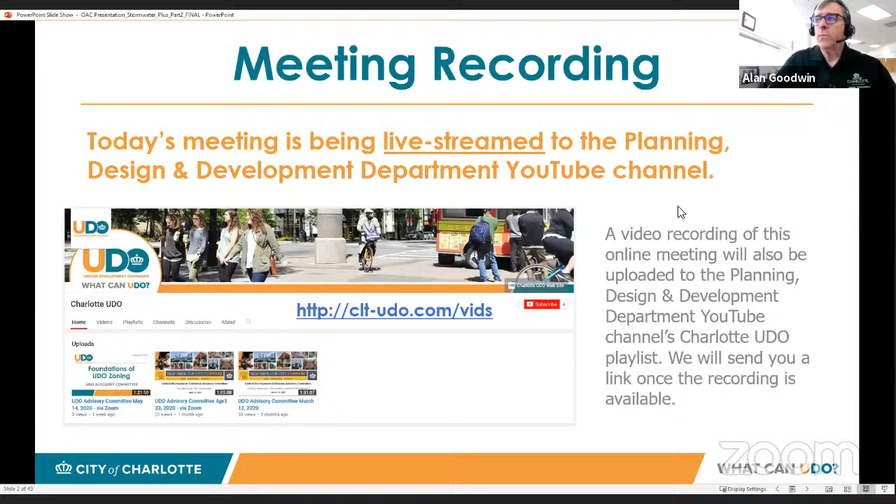And just as a reminder, we've got a presentation that will be narrated by staff today. There will be a couple of stops along the way that we can stop and discuss the material and answer questions you may have at that time. But in the meantime, as we go along, if questions come to mind, please use the chat feature in Zoom to enter your questions. We'll try to keep up with them as best we can live, but chances are we may have to go back and revisit some of the chat and make sure we've answered questions and addressed comments as they've come in. And then obviously at the end, we'll stop and spend as much time as we need to deal with the questions and comments that have come in during the course of the presentation. So at this point, I believe I am handing off to Jordan Miller from our stormwater section.

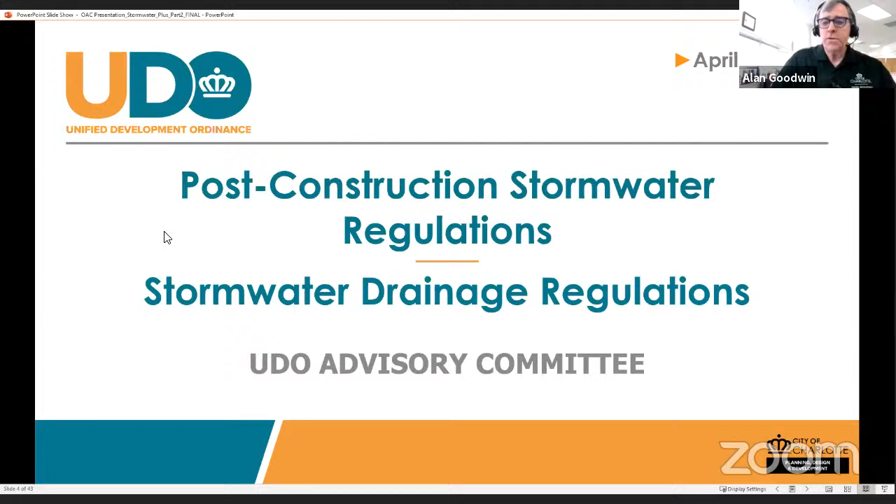Today's topics, we've got a couple of topics to cover today. We're going to be talking about post-construction stormwater regulations and also stormwater drainage regulations. So Jordan, I think this is where I hand off to you.

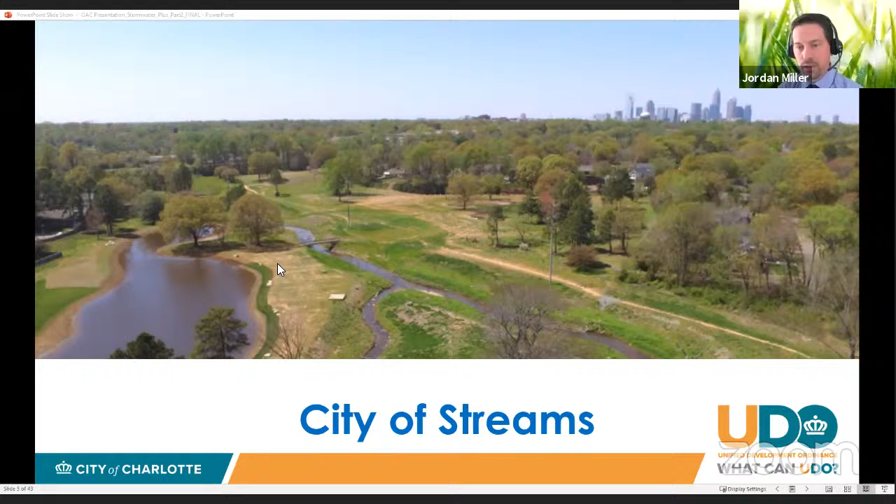Thanks, Alan. Appreciate it. So a lot of these first few slides will be the same slides that some or all of y'all would have seen 2 weeks ago when we began the stormwater discussions. So this is just a lead-in slide to remind everyone that we have many, many streams and tributaries within our watershed. We rest on a ridge. So we are the headwaters of a lot of streams, meaning we are where a lot of the streams begin and lead into both the Yadkin and Catawba river basins.

We have reasons to do that outside of being good stewards of the environment and in regards to federal, state, and local laws and policies. And then one of the main goals of stormwater services is to manage the city's Phase 1 municipal separate storm sewer system permit, which is a federal requirement and is implemented by the state of North Carolina.

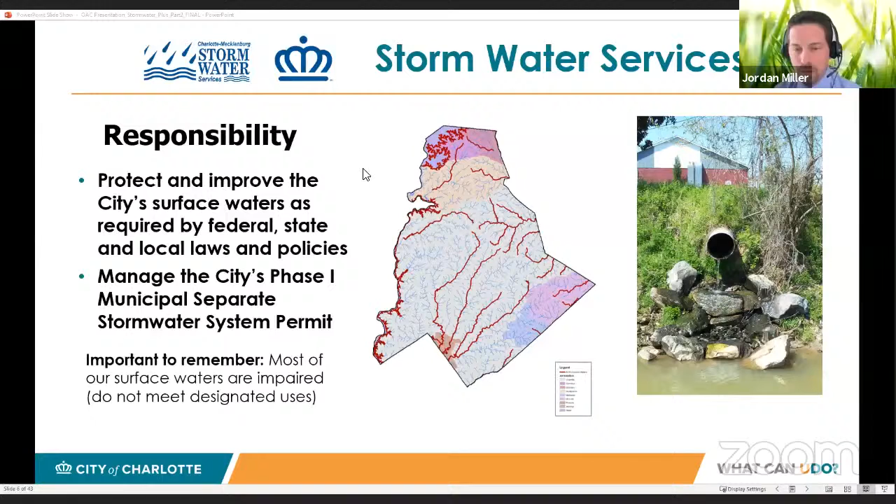Next slide, thanks. And this is just a reminder, as Taiwo mentioned in the beginning, about the connection between the comp plan and the UDO and this implementation arm of those goals and policies that will be set in the eventual comp plan. And then you can see on the right all the different ordinances that are being pulled into the UDO. Today we're going to talk about an existing ordinance, the post-construction stormwater ordinance, which is in chapter 18 of City Code, as well as Kate will be discussing some drainage article sections. And one of those will be pulling some information out of the subdivision chapter about flood study requirements. So again, trying to compile this into a more uniform section.

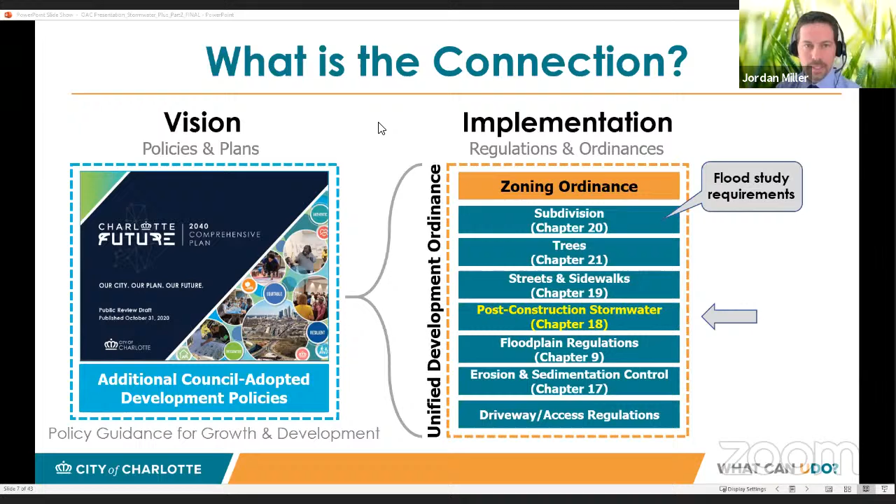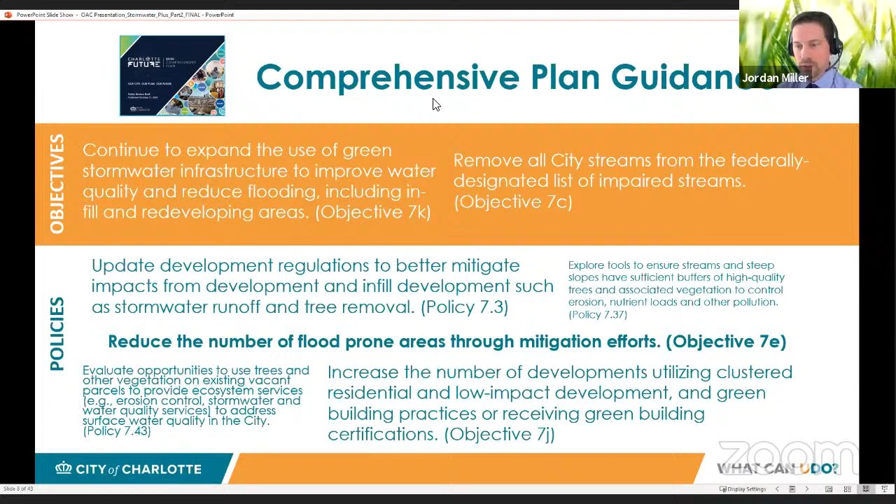Again, this is a repeat slide, but just a reminder of some of the existing draft policies and objectives and goals within the draft comprehensive plan that relate specifically to the environment and stormwater. And so this is not meant to read through this, but just as something to keep in mind as you're thinking about what the city's goals are.

So an overview of the stormwater chapter thus far, we've already hit the first 4 that you see there. The 2 that we're going to discuss today, to reiterate, are post-construction stormwater as well as drainage regulations. For post-construction, it's mostly dealing with regulating runoff and pollutant loading leaving sites after development. Last time Jay Wilson talked about regulating those types of things during development when a site is under construction. So this will be the post-development impact on the downstream system. And then Kate will be talking about more drainage related regulations as it relates to individual sites and how they might impact the drainage system.

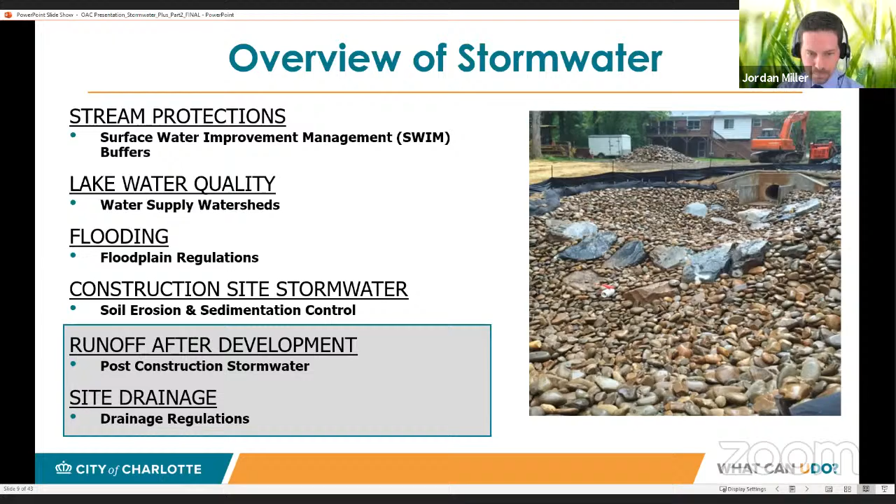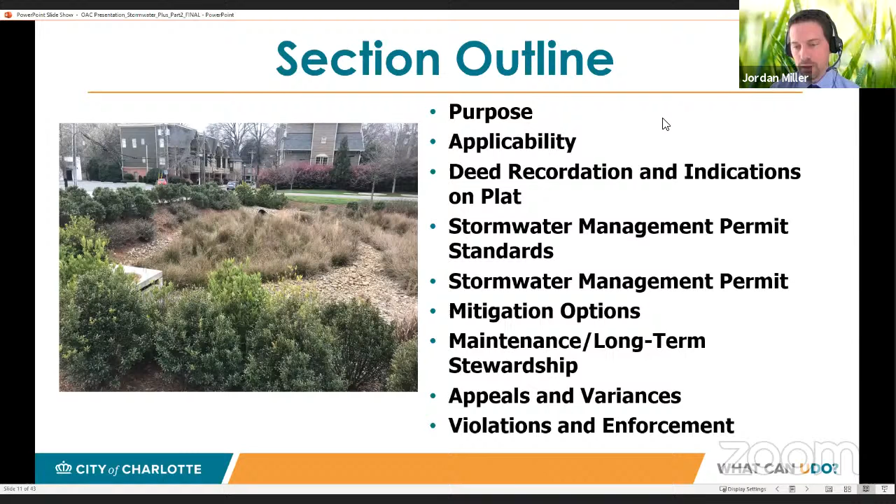And so we have a purpose and applicability section, some deed recordation requirements, and then it gets into sort of the meat of the standards and stormwater management requirements, as well as some logistics of how you obtain a permit and go through that, and then on to some mitigation options that have been built into the ordinance for 13 years, as well as the maintenance and long-term stewardship. As you can see to the left, a lot of the requirements in this section, as you will see in the next few slides, result in physical assets being built on property. And so those obviously need to be maintained just like anything else. And so talking about maintenance and long-term stewardship of those assets. Then obviously, as with most ordinances, there's an appeal and variance process, and then violation and enforcement type proceedings that are included in the article.

So again, to reiterate the overview, this ordinance is a requirement of the city's NPDES permit, which is spelled out there. And we are required to have an ordinance to regulate post-construction runoff. And so this is the mechanism legally that we use to satisfy that condition of the permit. The state of North Carolina Department of Environmental Quality issues our permit. They review our ordinance as one of the 9 requirements of that permit, and they make sure that it meets the state's minimum standards. And sometimes the state does have something that would be a maximum as well, which will come up later in this talk.

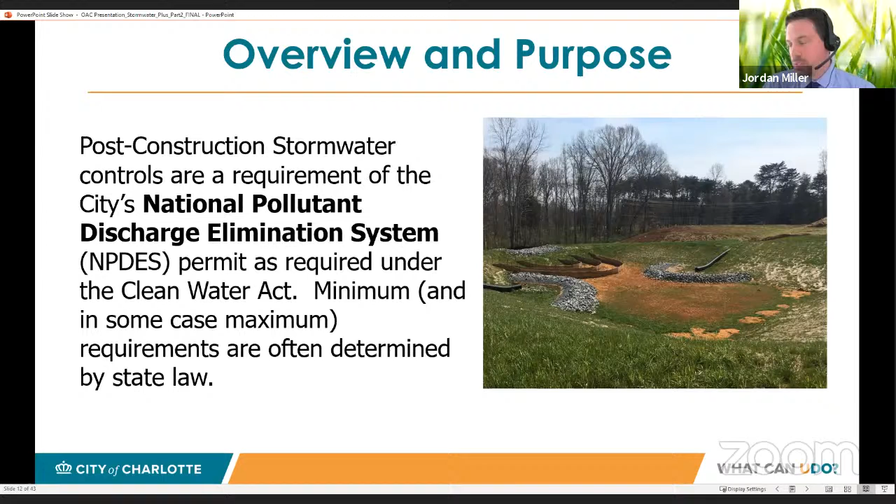And an overview. So this has been the stated purpose of the ordinance since its original adoption in 2008. And it's to protect and maintain and enhance public health, safety, and environment by minimizing impacts of stormwater runoff and what we call non-point source pollution. So not someone dumping something into the creek or a leaky pipe like an oil spill. It's something that is a non-point source. So it's something that isn't easily attainable from where it may have derived from.

So much of that is stormwater runoff. And so we want to improve our surface water quality by regulating that runoff and minimize damage to downstream property infrastructure. So that's one big thing.

And then a term that I want to point out because it'll come up several times, and I know folks on the call may not be familiar with it, is the term built upon area, which essentially is impervious or partially impervious materials. You can think of gravel, concrete, rooftops, sidewalks, asphalt, pavement, anything that would basically restrict the soil's ability to infiltrate stormwater or rain water directly into the ground. So you can think about those types of materials when we mention built upon area or BUA. I will probably say BUA because it's a habit, so apologies in advance.

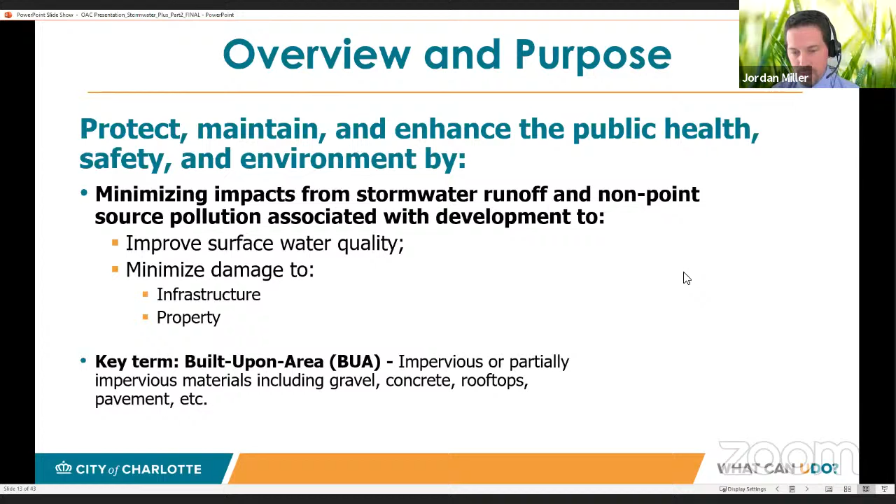So the 4 main requirements of the current ordinance, we'll just kind of roll through these real quick. Those of you that were on the call 2 weeks ago heard a little bit about what we call swim buffers. It's very similar. So the post-construction ordinance requires stream buffers. They tend to be required on more streams because they go further up into the watershed uphill, if you can think of it that way, on smaller tributaries. And they range anywhere from 30 feet to 200 feet.

The reasons why we regulate stream buffers are listed there, but they are to protect habitat for wildlife. They're to keep temperature control within the stream, which also helps with habitat, to filter out pollutants as rainwater, stormwater runoff comes through that buffer, as well as some of the other things listed here.

And they range so greatly because what we've done with this ordinance previously is accommodated development within 3 main watershed districts: the Central Catawba, where we have more already impaired, more urban environment; the Yadkin, which is on the east side of the county and the city, where it's more of a greenfield development, and there's actually an endangered species habitat present that we needed to address. And then the Western Catawba, where it drains to our drinking water supply, which we also talked about 2 weeks ago. So different levels of protection, and that's why there's such a wide range of buffers, because the buffers would vary depending on the level of protection that was the goal some 13 years ago.

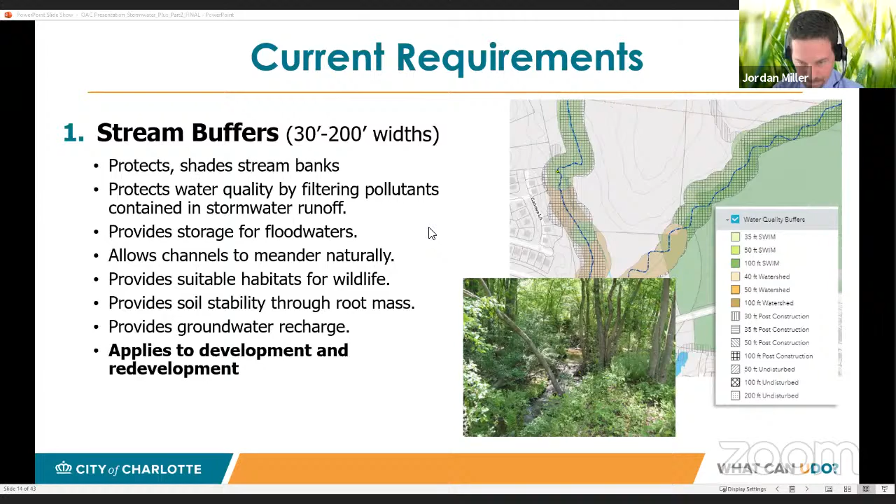And then forested natural area is a term that is similar to other sort of open space requirements that the city might have in other articles. But the main goal was to preserve some area of the site to have a treed area of environment that would be protected. And the amount of area that would be required would depend on the level of development that was to occur on that site. And this would apply to all development.

The one thing to point out here, I took this sort of Google Street View image so as not to relay that all of these areas end up being the forest that's shown on the right. This can be provided in planting strips or easements and right-of-ways where it may be restricted to plant a true forest type environment, but you may be able to get some lower maturing type trees, small maturing trees, and other types of vegetation that can still provide some of the similar benefit.

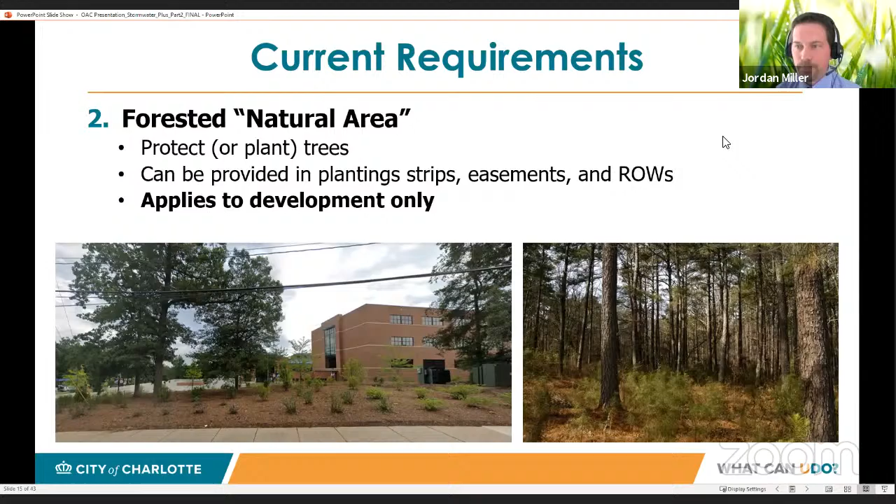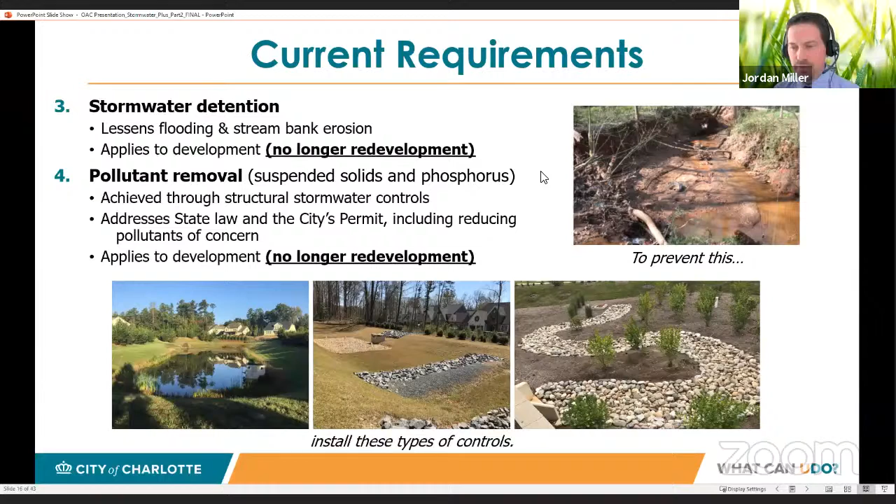Thanks. And then some potential key changes. So that was just mostly an overview of what this ordinance is meant to do and what the current requirements are. So the easy ones are on this slide, which we're moving from Chapter 18 into the UDO and the Stormwater and Natural Resources section. That's an easy one. Some removal of some older exemptions. This has been fairly consistent through at least all of the stormwater articles we've been working on. Just looking at what's either out of date, isn't even relevant anymore, what's never used, what's confusing. How can we combine some of these to make it more user friendly, and just remove unnecessary verbiage.

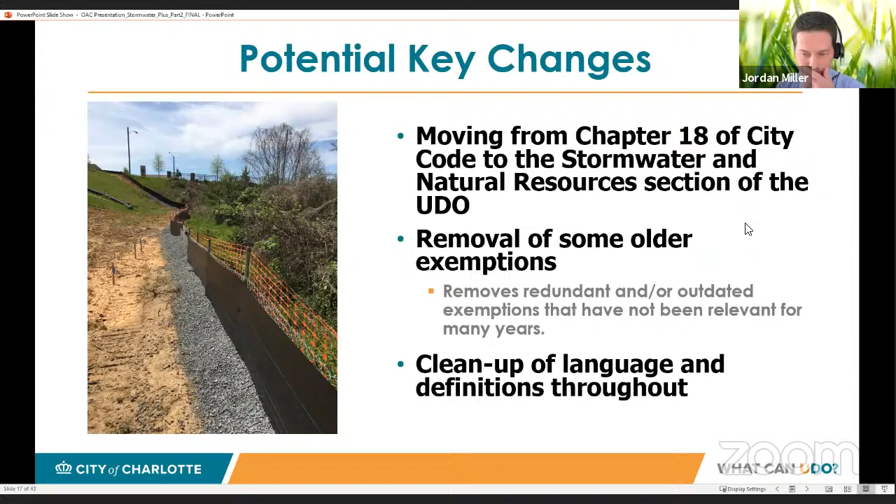And then the last one on this slide is the cleanup of language and definitions throughout, which, again, most of these are pretty benign, mostly trying to make things consistent through different sections and articles. So here's the ones that are more specific to post-construction that would be in the potential UDO proposal. And I'll touch on this one in more detail, because I know for some folks on the call this will trigger.

Pun intended. Applicability triggers right now are dependent on your type of development. So are you a residential or a commercial? Those are defined specifically in the ordinance, which may be different from zoning rules if folks are familiar with those, but essentially single family residential versus everything else. So they may have different triggers that may not be totally equitable if you took the same site and developed it in 2 different manners. And in the new UDO proposal, we would be potentially lowering that trigger and making it consistent across all use types, instead of having one type of development have a totally different trigger than another. Again, I'll touch on this in more detail.

And then redevelopment, this is due to a change in state law from 2018. We are required by that law to change our ordinance to meet the removal of the redevelopment requirements. And we haven't done so because we've just been, in practice and policy, not enforcing that section of the ordinance, and because we were working on the UDO, so it didn't make sense to open up the ordinance and change it twice. So this is mostly a cleanup to align with the state law that was passed in late 2018.

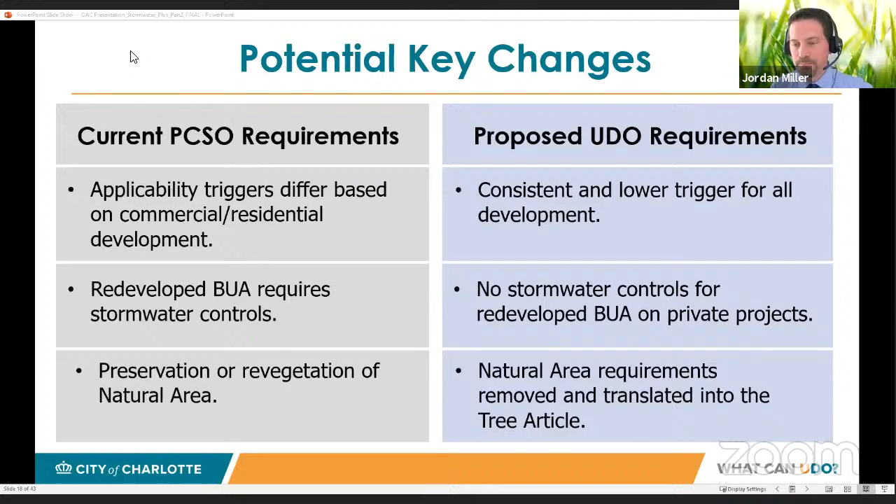And then currently, this is a little bit down in the weeds, but currently you have some mitigation options. And when I say that, that means instead of doing maybe all 4 of those things that we mentioned on the previous slides, maybe you do, and this is not technically accurate, but maybe you do 3 out of the 4. Basically, you would do less on your site if you're in a specific geographic location that was intended to incentivize density and redevelopment. Those are along the transit corridors, the light rail, so along the Blue Line and Blue Line extension and potential future light rail alignments.

So again, near the transit stations, you want to have this dense environment. And so we wanted to allow for folks to do that and promote that to happen. And so we allowed for some differences in what the requirements might be as opposed to a greenfield site where it's basically a blank slate.

And so in the proposed UDO, we would look to either remove some of those incentives since they were specific to redevelopment, we can no longer regulate that, or permanently establish the geography because it's been tied to a little bit of a moving target. The geography has changed over time. And so we're looking to either remove some of those incentives because they may not be as useful anymore, or permanently establish the geography so it doesn't change over time unnecessarily.

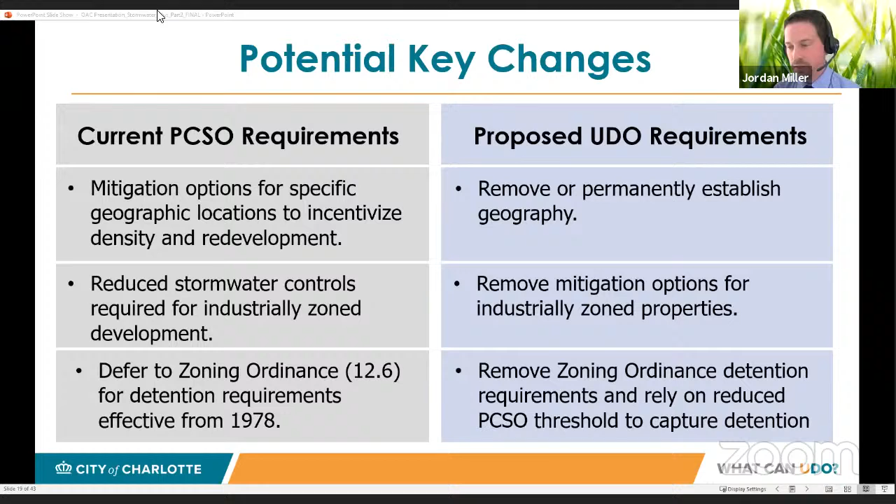Next slide. So this is a comparison, because the next slide is going to talk about the potential lower threshold. So this is a comparison of some North Carolina municipalities and then some other municipalities in the region and their thresholds generally as it relates to built upon area. Again, that's what BUA is. Some of these do use a disturbance threshold, as you can see towards the bottom there, it's underlined. But again, just to show how we might match up to other municipalities in the stormwater regulatory realm.

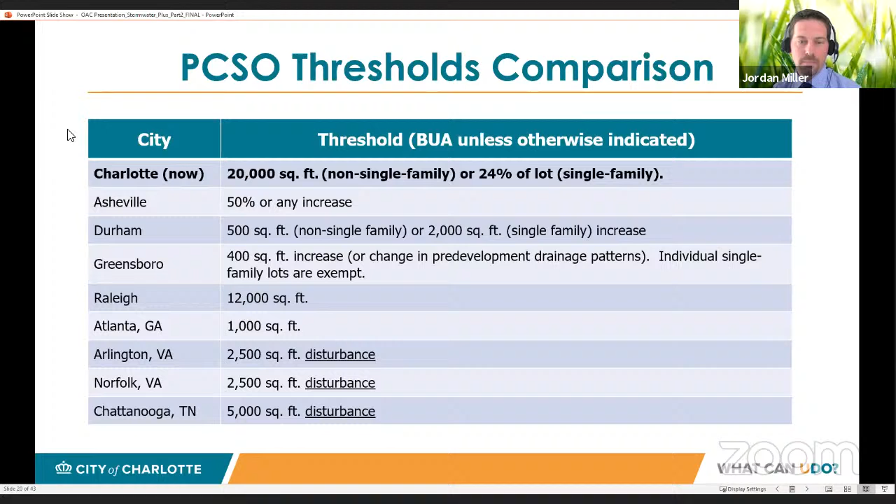So here, we currently have 20,000 square feet as the threshold for non-single family type development. So 20,000 square feet of built upon area placed on a site after 2008, you have to comply with this ordinance. What compliance means varies on a bunch of different things, but essentially that's the trigger to get you in the door. And then for single family, it's different, as I mentioned. So it's 24%, which can obviously vary depending on if you have a large site or a small site, and that's for single family specifically. So you can see how that may match up to some of these other cities that have similar ordinances.

So the current, again, is 20,000 or 24%. And the potential proposed draft here is to make everything consistent at 5,000. There is also a current trigger of 1 acre of disturbance, and that would remain. So really it's just changing the built upon area trigger. And the goal is to make that more equitable across. One site developed next to another one for different types of uses could have 19,000 square feet of built upon area, and the single family may be only allowed 3,000 because of the site size and the triggers. So this is to more equitably require those compliance measures on site.

And some of the reasoning behind that was based on the average lot size of a single family use lot within this city as of now. And 24% of the average lot is approximately 5,000 on average. So that was another reasoning. And looking at potentially lowering that, again, helps us to potentially remove the detention requirements within the zoning ordinance, so we don't have these potentially overlapping requirements.

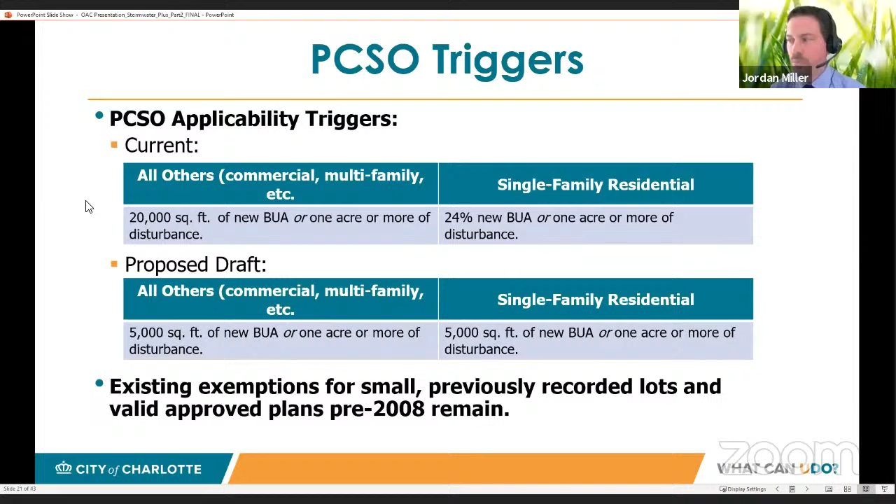And then existing exemptions for small previously recorded lots that have been in the ordinance since 2008, all that's going to remain in there. So we're not removing any of the grandfathering of old lots that some folks may be familiar with, mostly relating to single family or small multifamily sites. Those will remain in there. And so this is just a snapshot, so you see the change. It's the same chart as you saw before, but with the proposed 5,000, how that might stack up with some comparable municipalities.

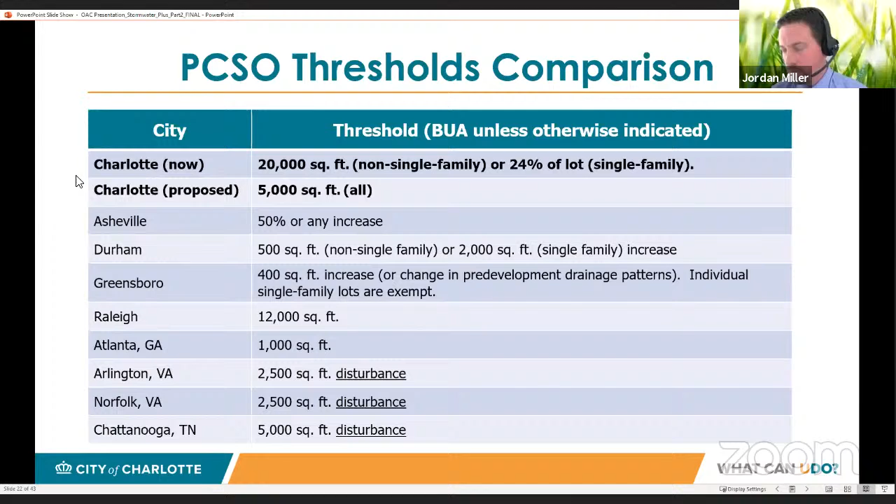And that is all of the information I have. I know I saw some questions. Andrew or Alan, you want to handle that? Yeah, I'll moderate. Thanks, Jordan. Great job. The first question we had in was from Eric Zaverl. The question was, are there any more urban solutions to stormwater detention, rainwater controls? And he sent a couple of examples. The pictures that I saw were kind of green infrastructure, cutouts into sidewalks with areas that retain stormwater. Any thoughts or comments on that about urban solutions to stormwater detention?

Yes, and very familiar with Seattle, Portland, DC. Those are some of the big ones in the country that have some of these more green infrastructure type stormwater control measures, and those are allowed. Generally speaking, those are either bioswales or bioretention, which we do have standards and design guidelines for, and folks can choose to use those. I will say that some differences here are that generally they need to be outside of the public right of way. A lot of these that were linked may have been installed by the city or stormwater utility, although they're generally a combined sewer system. The images provided are probably in the right of way, and that may be different here in the city of Charlotte, whereas a development may need to handle that outside of the right of way.

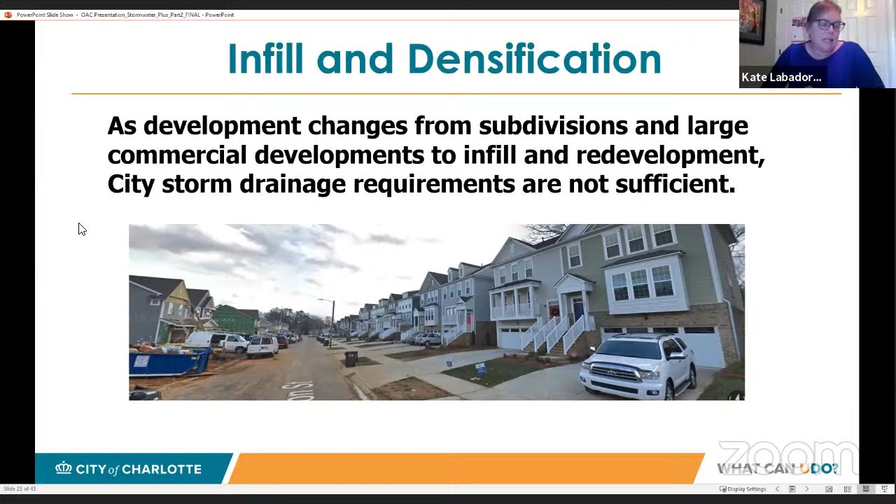Yep. And we will hand it off to Kate Labadorf to talk about our stormwater drainage regulations. Thank you, Andrew. We can go to the next slide. The city currently reviews and inspects subdivisions, commercial projects, and multifamily for drainage. But we're seeing more and more development that doesn't trigger a drainage review or construction inspection: infill, redevelopment, smaller exempt minor subdivisions. Next slide.

And as infill development increases, we're finding more development-related drainage issues, and stormwater is receiving more development-related calls requesting service. And just over the past 2 years, we've received over 200 development-related calls. And so these bullets are just kind of a grouping of the issues that we're seeing.

We're seeing modifications to the city drainage system, either systems being removed or modified. When not done correctly, this can damage or create problems with the city's drainage system. And stormwater then either has to go after the developer or the property owner, or has to spend monies and resources to correct the issue.

New homes, buildings, additions, pools are being built within city or public drainage easements, and sometimes the structures are even built on top of the drainage system. This makes maintaining the drainage system a nightmare. And if an issue develops with the drainage system, it can cause structural and or foundation issues for the home.

Installing inadequate systems or using poor construction methods, this can cause flooding and or create maintenance issues that the new homeowner or adjacent property owner has to deal with and attempt to address. Residential driveway locations can conflict with existing drainage systems, which usually leads the developer to either remove or modify or damage the city's drainage system.

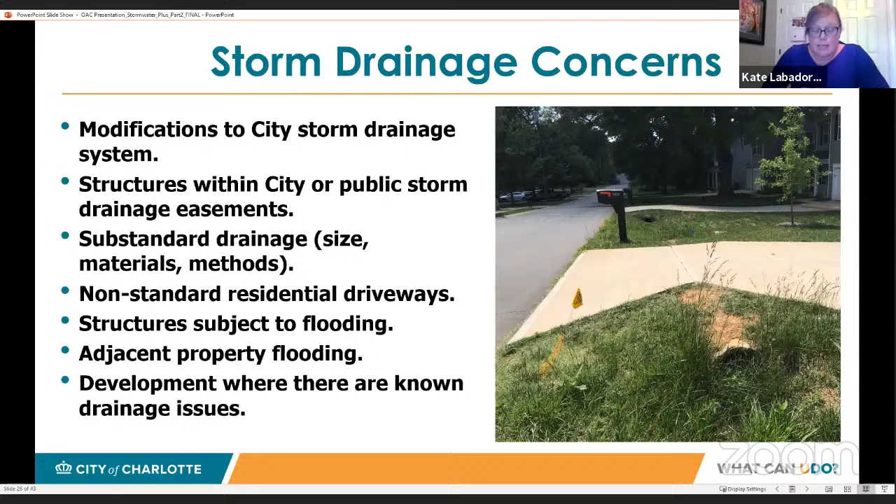And lastly, developing where there's known drainage issues. And so there are existing drainage problems throughout the city. And as development becomes more intense, there's less land and less options to improve and maintain the drainage system. So I'd like to share 4 examples with you that illustrate some of these drainage concerns.

This first example, 3 single homes were demolished and 3 duplexes were built. The upper photo shows the 3 homes that were torn down. The lower photo shows the duplexes that were built. To the left in the upper photo where that fence is, that is a storm channel with a gabion wall. And when the developer graded the lots, he excavated for basements and he also added fill in places.

Stormwater Services had previously improved the channel along that fence line adjacent to the property and built a gabion wall, which is a rock wall structure along the channel bank. As part of that project, the previous homeowner granted the city a drainage easement to maintain the channel and the gabion wall. And the developer added gabion baskets.

So when he added the fill, he actually added gabion baskets on top of the city's gabion wall in order to add the fill to the lot that you see past the white car; that reddish area is filled up. We don't know if this gabion wall addition was structurally engineered or if it's structurally stable.

Also, the developer didn't follow the residential driveway standards, sloping the driveway apron up from the roadway before sloping it down. You can see on that bottom picture that there's little to no curbing or elevation to keep the water in the street. So when it rains, since this is almost at the bottom of the hill, water comes down the road and actually goes down that driveway and into the garages. And there's finished floor behind those garages.

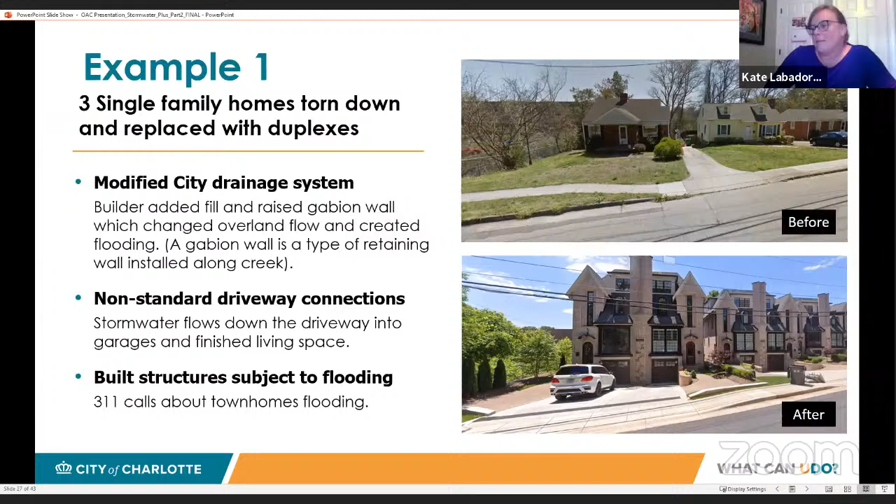So we found out about this development when the new property owner called complaining about living space flooding, expecting us to solve their drainage problem. Next example.

So this is a single family home that was torn down and a larger home built. The upper left photo shows the house that was torn down. It's the middle, so second in from the left.

And the upper right shows the new larger home with the driveway that goes down and comes around the back. The garage is actually off; you enter it in the back side of the property. So Stormwater Services previously improved this drainage system. You can see the red line on both maps. That's the drainage system. And the previous property owner granted us an easement to maintain the system.

When the developer built the new home, he added fill to the site, and this required that he raise the inlet in the back. In the lower photo to the left, it's kind of hard to see, but there is a brown structure close to the vegetation just past the corner of the house. That is a yard inlet. He raised this inlet using substandard materials and methods for construction. In raising the inlet, he caused an issue for the adjacent property.

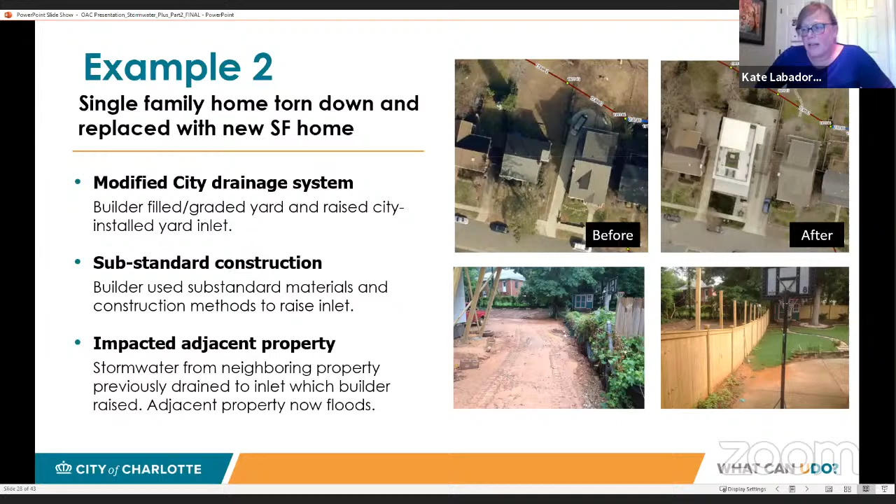So on the lower right, that property is the next door neighbor with the wood privacy fence. And if you look at where the mud is collecting, that's where that property is supposed to drain into the inlet. But when the developer raised it, it can no longer drain into that inlet. So we learned about this development when the adjacent property owner called to complain about the flooding and the muddy mess in his backyard.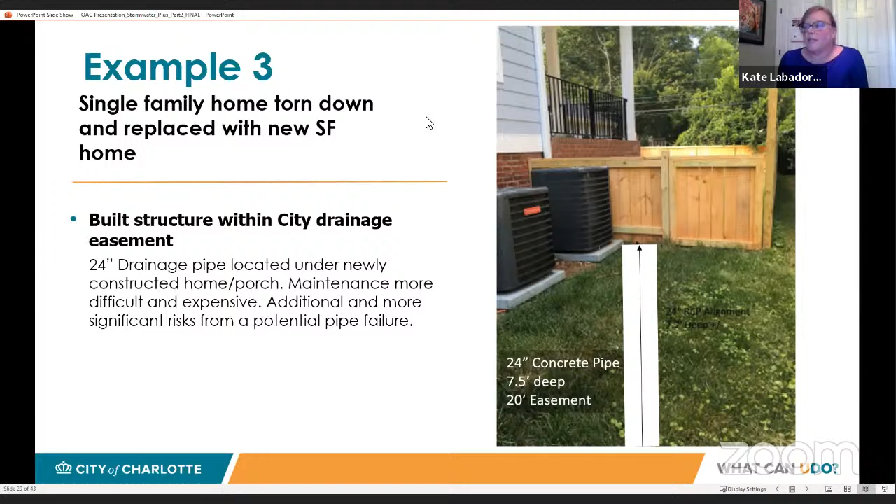If the pipe deteriorates and fails, the house is at much greater risk of being damaged than if the house were further away from the drainage pipe. And you can see in the photo, we've approximated where that pipe is with the white shading, and you can see how it's going under the back corner of the house. We learned about this development when a stormwater inspector who was familiar with the capital project drove by and noticed the new home.

Fourth example, this is a new subdivision along an existing street. So the developer took 30 lots and divided it into about 70, give or take a few, for single family and multifamily homes. The upper photos show what this street looked like when it was 30 single family homes. The bottom photos show what it looks like now. The additional lots in the building result in many more driveways. And so if you look at that lower left or right photo, you can see that it's driveway after driveway after driveway with some small grass strips in between.

The upper left photo shows an elongated throat inlet, which is used to capture lots of drainage. It was installed as part of a capital project by Stormwater Services back in the early 2000s. That elongated throat catches a lot more water than a single catch basin or even a double catch basin. The lower left photo shows the driveway that was built at that same location of the elongated throat.

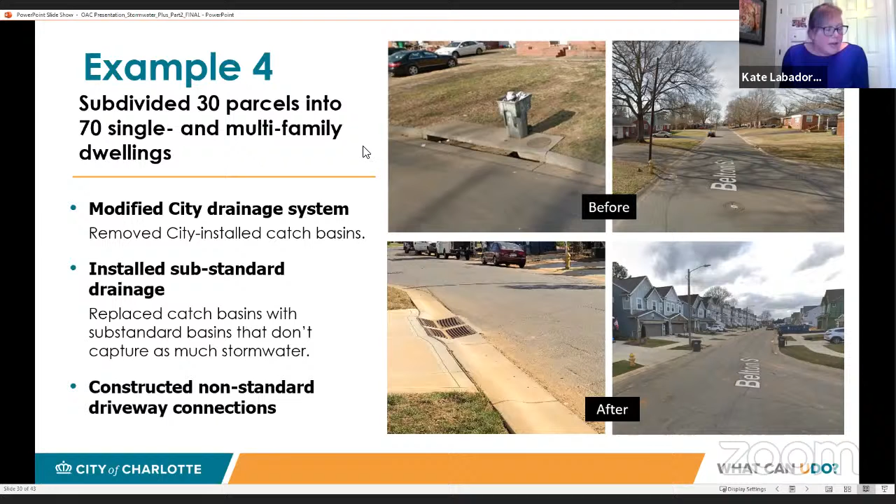So the builder gets ready to pour the driveway and realizes the conflict. And so he removes the elongated throat inlet and puts in two non-standard inlets at the driveway. So these two inlets don't capture near the water that the elongated throat used to capture. We found out about this site when the construction inspector was out looking at what was going on. But by then the house is built, there's little room to work with, and our options are limited on how to resolve the conflict.

Last example. This is 3 lots, and they were vacant. The developer subdivided one of the lots. So in all, he had 4 lots, and he built 4 single-family homes. The upper left photo is the before picture. And what you see is an existing red brick home. And then to the right is the beginnings of the first vacant lot. There was a stream running through the vacant lots. And the developer had to pipe in the stream, and he added significant fill to the lots.

The lower left photo is the same red brick house, but this is from the backyard. So you're looking at the red brick house, and the whitish colored house next to it is one of the new 4 homes. The white house is actually downstream of the red brick home. The water is supposed to go to your left when you look at the screen. So what the developer did was he installed an 18-inch plastic pipe. You look at the upper right photo, that's the pipe that was installed.

And it heads out where we think that pipe is actually under the 4th new home. It goes at a diagonal through those lots, and we're pretty sure it's under the 4th new home. And then if you look at the bottom picture on the right, that is a picture inside the new pipe showing you the condition. So there's already an issue with the pipe system due to poor construction methods.

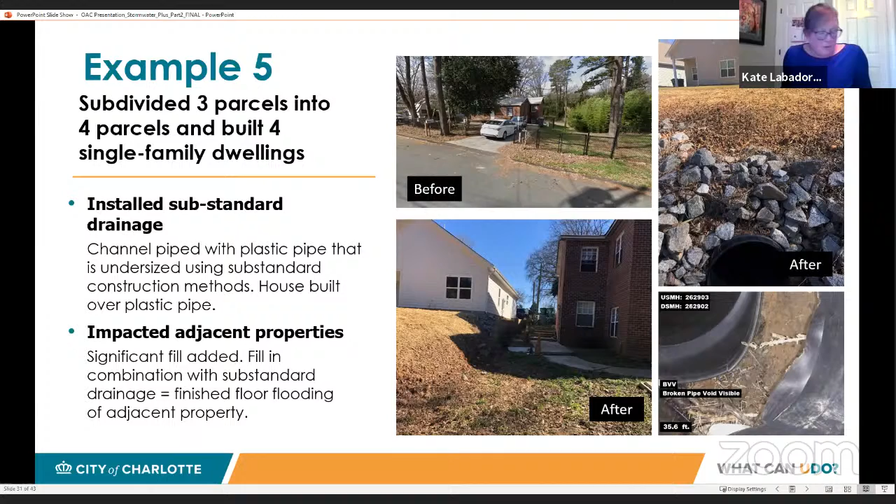And we found out about that one when the property owner in the red brick home called because he had 3 feet deep water in his living space. So I could continue for hours, maybe even days, with examples of drainage issues resulting from the smaller infill development. But instead, I'm going to transition to what we want to do moving forward to try to minimize future drainage issues as a result of development.

So looking at our current ordinances, development-related drainage requirements are scattered all over the place. Jordan kind of had that slide up before showing all the different ordinances that stormwater hits. But they're almost exclusively related to larger developments. And as part of the UDO, we're trying to consolidate these requirements into a section dedicated to drainage. And this is the section outline. The first is the purpose, primarily to protect public health and safety.

Then there's applicability, and we are expanding applicability from the larger developments to include smaller infill development, including new buildings, additions, swimming pools, including new or modified drainage systems that are either in the city's right-of-way, a drainage easement, or drainage systems that include runoff from a public street. And then also including where they're grading or doing fill activities and changing surface water patterns.

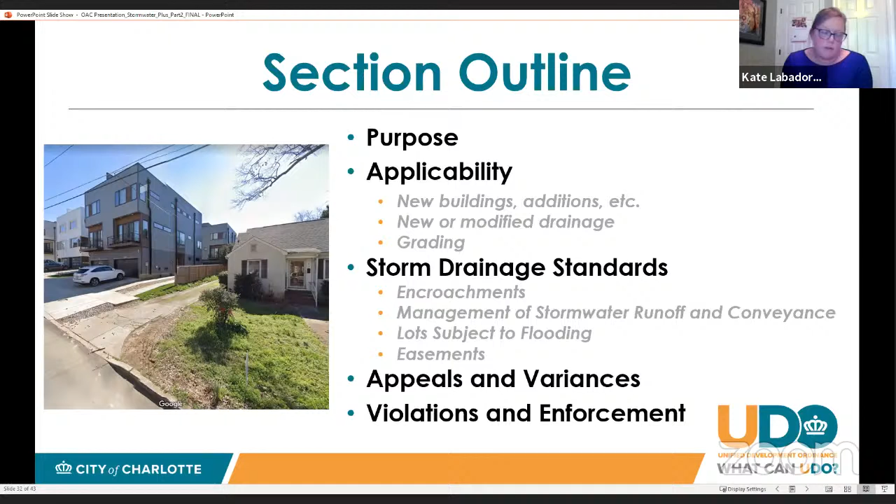For storm drainage standards, we've grouped that into 4 different sections, and I'm going to talk about those sections in just a minute. And then the end of the drainage section outlines the appeal and variance process, and then violations and enforcement. So next slide, this is getting into the actual storm drainage standards.

So, encroachments. Currently, the City of Charlotte storm drainage easements do prohibit structures from encroaching within the easement limits. And there are ordinances out there that say you can't obstruct the city drainage system. However, developers aren't always aware of the easement or the drainage system. And stormwater is often not aware, as those examples show, until after development occurs. And then it becomes a much more expensive issue to resolve.

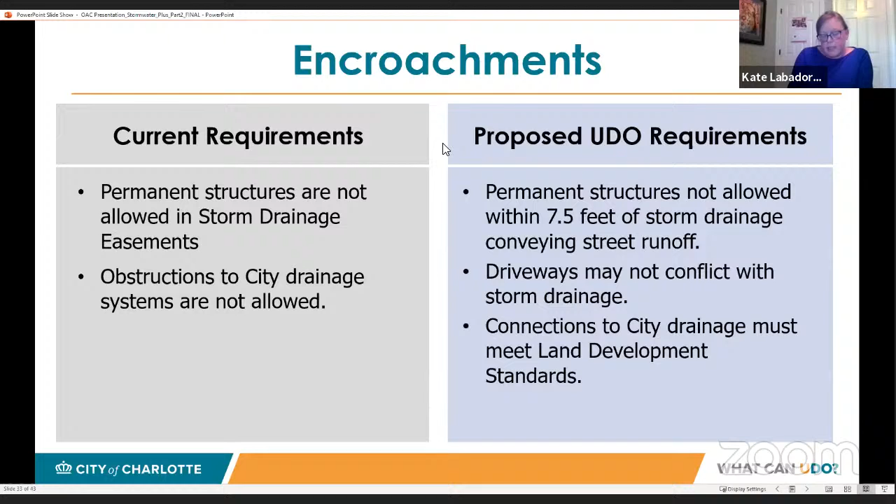So what we're proposing is to limit how close new structures can be built to storm drainage systems, to identify and limit driveway conflicts with existing drainage, and to ensure that connections to the city drainage system are constructed in accordance with Charlotte land development standards. So the next one is stormwater runoff and conveyance.

For subdivisions, commercial development, and development adding more than 20,000 square feet, developers have to submit a drainage plan with their subdivision plans or their commercial plans, and they have to meet the Charlotte land development standards and stormwater design manual. What we're proposing is that regardless of the size of the development, if it is installing new or modifying existing drainage, and that drainage conveys runoff from a public street, then the design and the installation of the drainage must meet the Charlotte land development standards and the stormwater design manual.

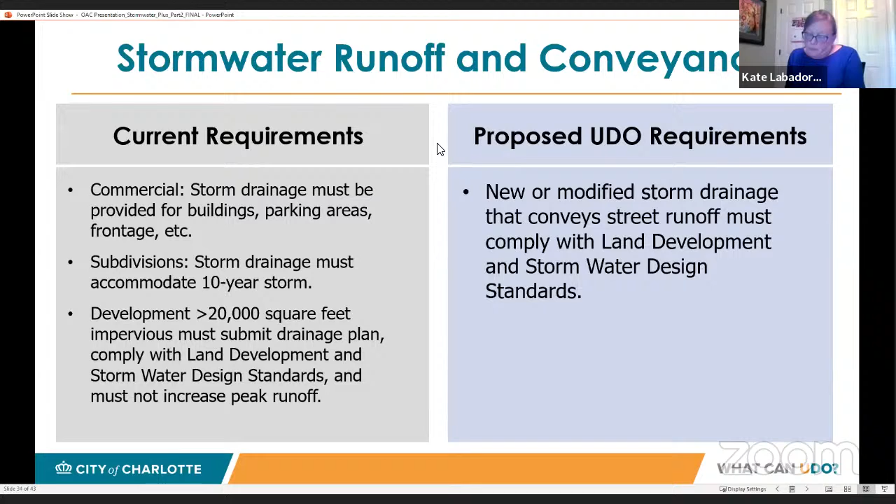Then lots subject to flooding. So currently in the subdivision ordinance, lots subject to flooding have to have a flood study done and identify the stormwater protection elevation line. What we're proposing is that regardless of the type of the development, if you're developing a lot that's subject to flooding, then a stormwater protection line should be determined, shown, and buildings built above this elevation so that we're not building new buildings that flood.

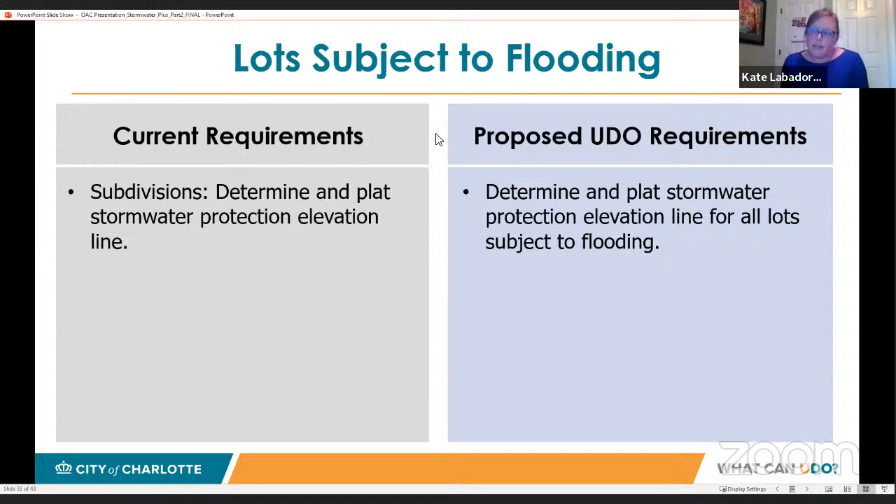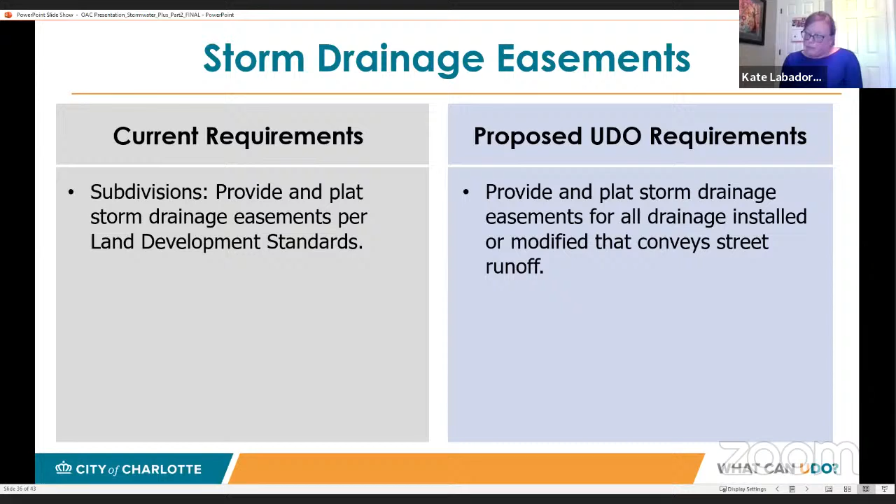And the last one, storm drainage easements. So currently subdivisions plat storm drainage easements per the land development standards. This is land that is set aside to allow and provide for the area to drain and for that drainage to be maintained. What we're proposing is that regardless of the type of development, if the lot conveys runoff from a public street, a drainage easement, as defined in the land development standards, should be set aside to allow and provide for the area to drain and to be able to maintain that drainage.

So what we're wanting to do is to have a drainage plan and permit. Let me back up a second. Today, subdivisions have to turn in plans, they're reviewed, the drainage is looked at. Commercial and multifamily typically have to turn in plans, they're reviewed and they're looked at. We have inspectors in the field that review and approve the construction. We're not proposing changes to that. We're just proposing a similar process for the smaller lots.

So a drainage submittal, review and approval, and inspection for building permits, adding drainage submittal, review and approval and inspection for connecting to the city drainage system, installing or modifying drainage that conveys water from a public street, or land disturbing activities like grading that modifies existing surface drainage. So in some cases that will be outside the typical subdivision, commercial, multifamily, or even the building permit process. But in most cases, the building permit process would be where this is added.

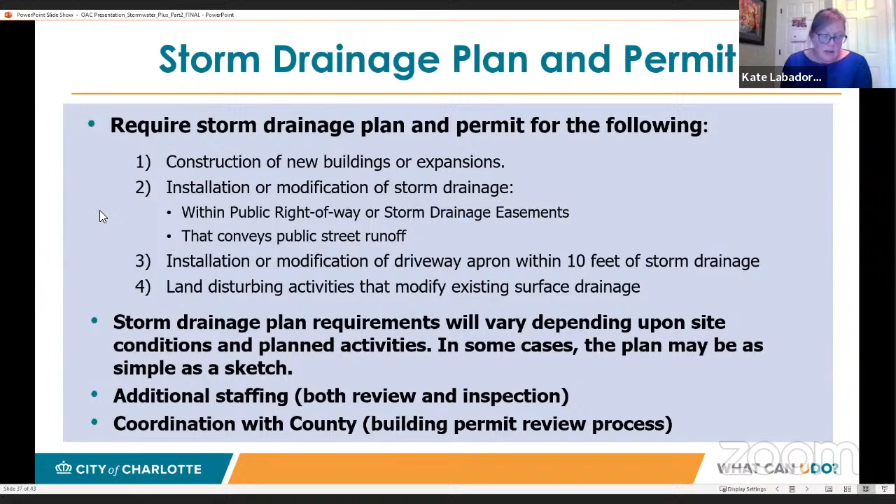The plan submittal requirements will depend upon site conditions and the planned activities. So in some cases, it may be as simple as a sketch showing where the new footprint of the building is going to be. In other cases, it may require engineer drawings. It all just depends on what's going on the site. From a staffing standpoint, it will require additional city staff. And it will require that we insert ourselves into the county building permit process, and also that we create a process for those that don't require building permits.

So to close, I want to kind of show you how those sites that I showed you before might be different if we had a drainage plan and permit process in place now. This one is example 3 from earlier. If we had a storm drainage plan as part of the building permit process, we would have identified the storm drainage easement and the existing pipe system at that point, and the proposed building location footprint could have been modified before ever digging the first shovel of dirt.

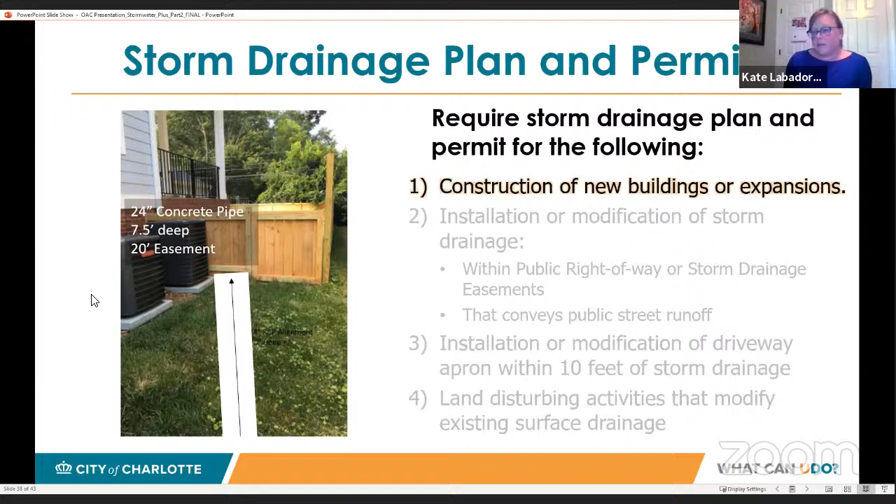This next one is example 1 from earlier. If there was a storm drainage permit required when you're installing or modifying the drainage system, we would have been part of the process to review and approve the modifications to the gabion baskets before they were constructed and the fill added and the structures built.

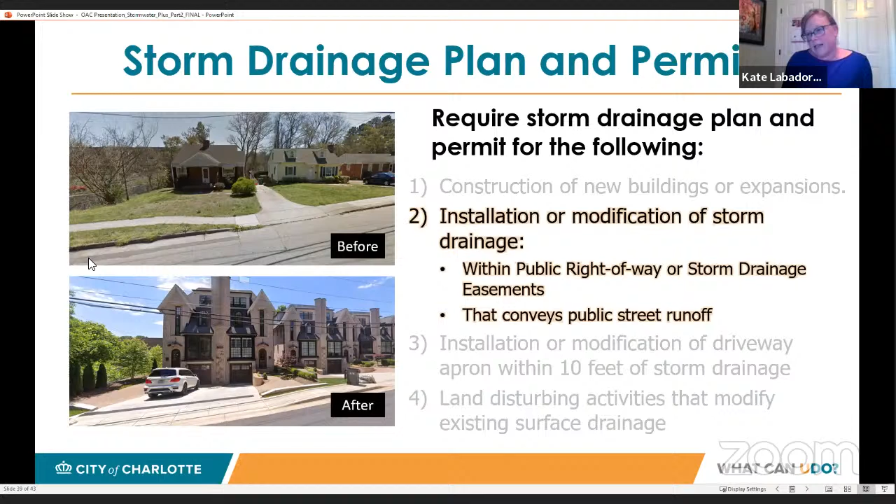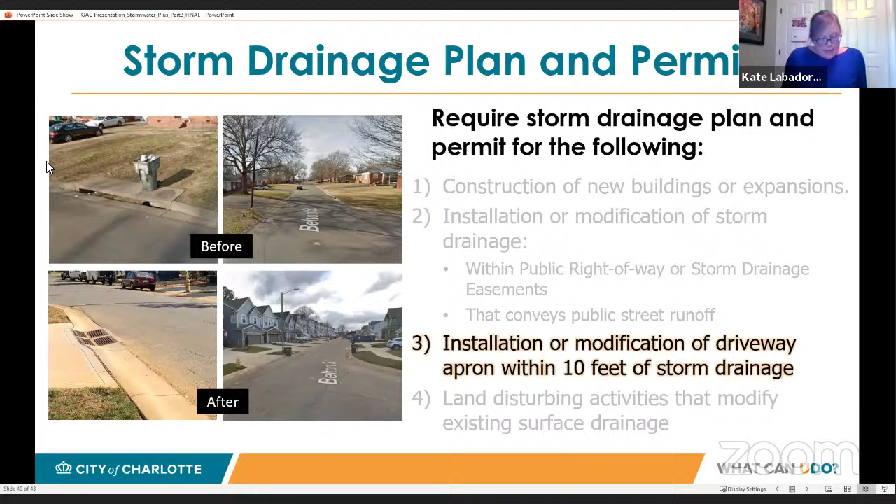And then this next one is example 4 from earlier. A storm drainage plan as part of the building permit process to install a driveway within 10 feet of a storm drainage would have identified this conflict of the elongated throat inlet with the proposed driveway prior to building the home, and the location of the garage could have been modified and the conflict resolved before the home was built.

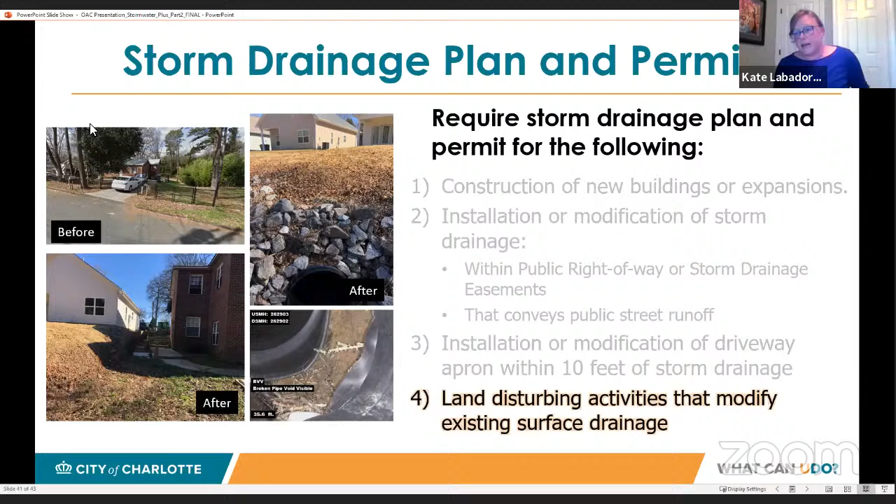And lastly, this was example 5 from earlier. If a storm drainage permit prior to grading the lots was required, we would have been able to work with the developer to redesign the proposed 4 lots and avoid flooding the upstream home. That is what I have. Questions and comments?

Thank you, Kate. I see 2 questions from Nate. The first one, and I think you covered this, but does this indicate that a homeowner will need to hire a PE to create a land development submittal? In some cases, but not all cases. And we're working on a checklist, starting with the existing land development checklist for subdivisions and commercials to see what would be different and try to have a very standard process that a homeowner can go through and go, okay, this is what I'm wanting to do. Here's what I will need to do. And do I need to hire an engineer or not?

And then the next one from Nate is, does the 7.5 foot additional no build zone in the easement or along the easement also translate to commercial projects? Yeah, and the 7.5 feet is just for areas where there's not existing easements. What we took was the existing land development easement widths, and the smallest one is 15 feet, and cut it in half. And said, hey, you know what? We need to at least be 7.5 feet away from the drainage in order for there to be any hopes to maintain the system and to convey the water like it's meant to. That's for existing systems with no easement. Okay.